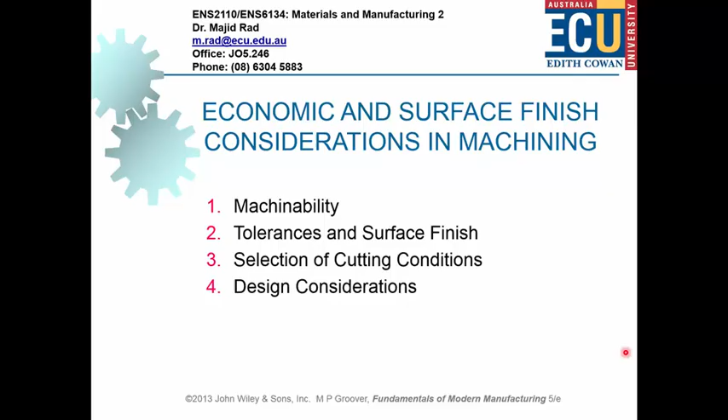What is the definition for machinability? Machinability is defined as the relative ease with which a material can be machined, when we are making use of appropriate machining process or machine tool, cutting conditions, as well as cutting tools, because all of this plays a role in the success of a machining process.

The mechanical and physical properties of the material will play a role in the success of a machining process, and this will affect machinability. For many engineering applications we are interested in high strength and hardness of the material, and for doing this we often add alloying elements to improve its mechanical and physical properties, which may enhance the strength of the material.

However, we should be aware that this will have a negative impact on machinability. As the material becomes stronger and harder, its machinability will be lower. It is harder to machine a stronger material than a softer one, so we may need to compromise between machinability and the strength and hardness of the material.

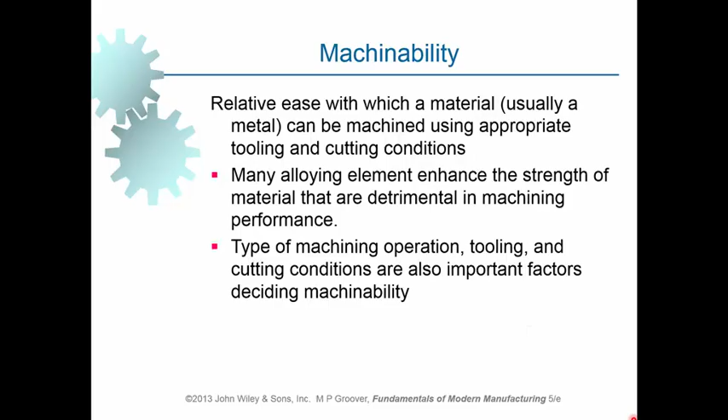When we are dealing with a machinable material or process, the resulting forces and power will be less. The reason is there is a need for less machining forces and power requirements to cut the material because of the lower strength of the material.

Also, when dealing with a machinable material, it's easier to achieve a better surface finish. When machinability is low, the resultant surface finish will not be so good, and we may require additional operations to improve it, increasing the cost of production. However, in machinable materials, by making use of the same process and same cutting conditions, we may achieve a better surface finish, eliminating the need for an additional machining process.

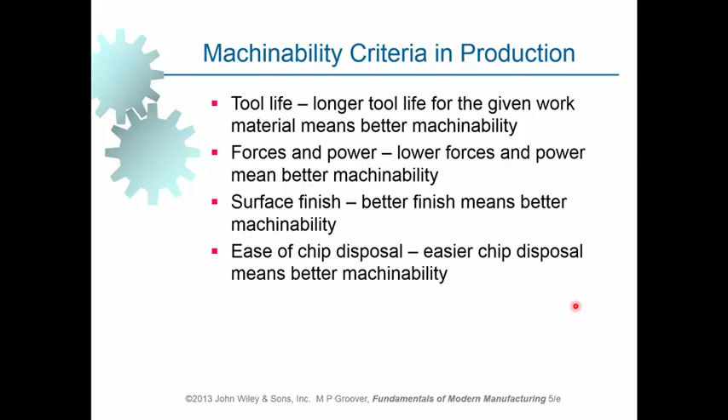Also, the ease of chip disposal is important. Sometimes chip disposal becomes a barrier against productivity. For a material with high machinability, it is easy to dispose of the chip and remove the material from the machine and the work environment.

When we talk about machinability, what we are doing is comparing the ease of machining of one material with other ones, and in order to do that, a number of tests can be performed to rank the materials according to their machinability.

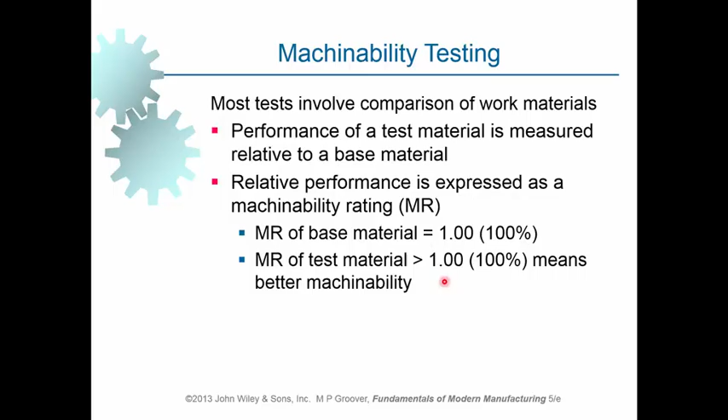The relative performance is expressed in terms of machinability rating, or MR. Often when comparing the machinability of different materials, a material is chosen as the base material and its machinability is rated as 1 or 100%. All other materials are rated in comparison with the base material. If the MR of a test material is greater than 1, it has better machinability than the base material; if its MR is less than 1, its machinability is lower.

Well, now let's take a look at this example problem to see how we can rate different types of materials on the basis of their machinability.

We are familiar with Taylor's tool life equation from the previous lecture. In Taylor's equation, V represents cutting speed, T is the tool life. This exponent, referred to as Taylor's tool life exponent, depends on the quality of the cutting tool material, and it is represented by lowercase n.

For this given example, it is 0.28, and this is equal to a constant value for a given material and operation, that is C. For this base material, the values of N and C are given. We are subjecting the same operation to a different material, the test material, and for this second material the values of N and C are different. N is very close to what we had before, and C is different.

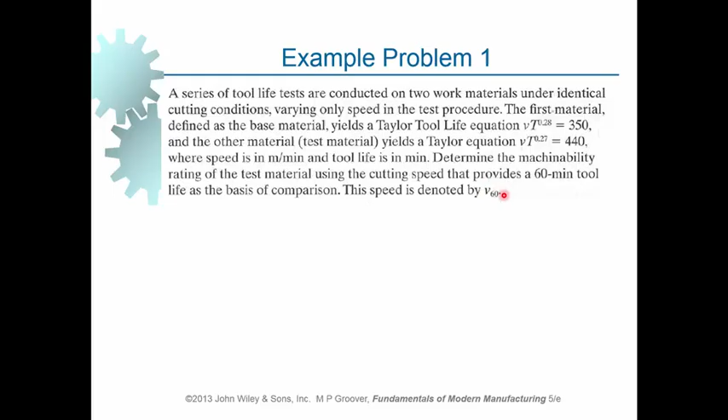In order to do this problem, we've got to make use of the Taylor's tool life equation given here, and we can solve the equation for V, which results in this. Then what is given for the base material in the statement of the problem is to be substituted into this equation.

So the values of C and N are given, and we know that we are going to compute a cutting speed giving us a tool life of 60 minutes. So 60 sits in the place of T. For the base material, a cutting speed giving us a tool life of 60 minutes is computed now, and that is equal to 111 meters per minute.

We can do the same for the second material, or the test material, by substituting the values of C and also N in this equation. Then we can compute the cutting speed giving us a tool life of 60 minutes for the test material, and this comes to 146 meters per minute.

Now, when we want to rate the machinability of this test material with respect to the base material, all we need to do is divide this value, the cutting speed of the test material for a tool life of 60 minutes, by the cutting speed of the base material for a tool life of 60 minutes. This gives us a machinability rating for the test material equal to 1.31, or 131%.

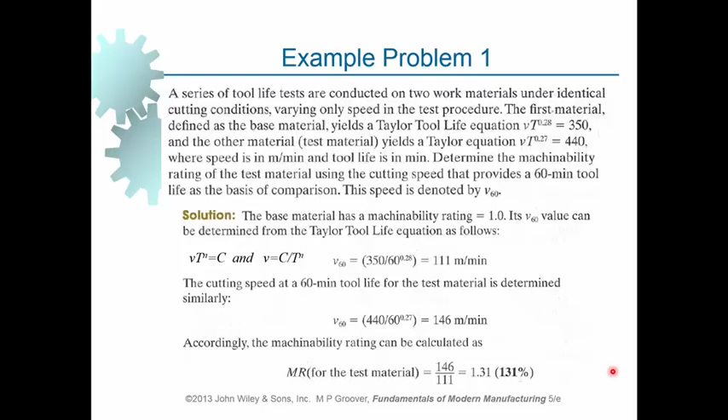What this means is that the machinability of the test material is greater than the base material. So in order to rate the machinability of the test material in this given example, what we took into consideration was the tool life criterion, and this is the most common criterion taken into consideration in assessing the machinability of different types of materials.

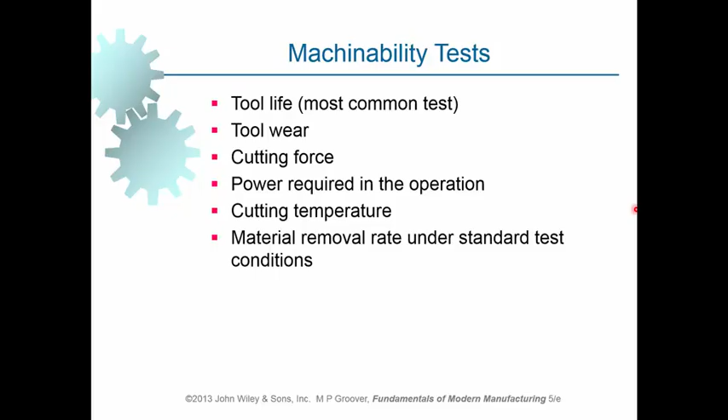Each one of these could be taken into consideration in the determination of machinability of different materials. However, as we can see, tool life is the most common test used to rate the machinability of different materials, and that was the case in the example we considered in the previous slide.

Well, now let's talk about mechanical properties of materials when deciding machinability.

Mechanical properties of materials include hardness. When hardness is high, abrasive wear increases, resulting in shorter tool life and increasing the cost of tooling. As we improve hardness and strength of the material, we decrease machinability, increasing the cost of manufacturing accordingly.

When we talk about hardness of steels, as carbon content increases, the strength and hardness of the material increase, and this reduces machining performance. So selection of a really hard material is no good when it comes to machining.

And strength: high strength means higher cutting forces, and that means specific energy and cutting temperature will be higher.

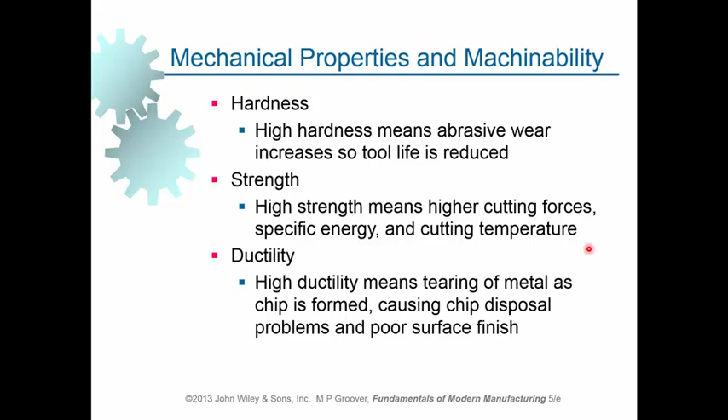Some other alloying elements including lead, sulfur, and phosphorus will reduce the coefficient of friction between the tool and the chip, reducing forces and temperature and also the possibility of creation of built-up edge, resulting in better tool life and better surface finish. So these are some considerations which ought to be taken into account when choosing the material.

Let's take a look at this slide here. In this slide we see a table rating different types of materials on the left against hardness of the material given in BHN, Brinell hardness number, and also machinability rating. In this table, the base material chosen is steel B1112. Its hardness value is given and its rating is 1.

The machinability of all the other materials in this table are rated on the basis of the machinability of the base metal. So B1112 steel is often used as the base metal, having a machinability rating of 1. Taking a look at this table, we can see there are different types of steels and alloy steels, stainless steels, tool steels, cast irons, medium hardness steels, as well as super alloys, titanium alloys, aluminum alloys, and some other types of alloys including copper, brass, and bronze.

Of all these, there are just a few materials with a higher machinability rating, including steel B1113 with a machinability rating of 1.35, free machining steels with a machinability rating of 1.5, as well as alloys of aluminium. Look at this one: the machinability rating of this type of aluminium is 5, which is a highly machinable material.

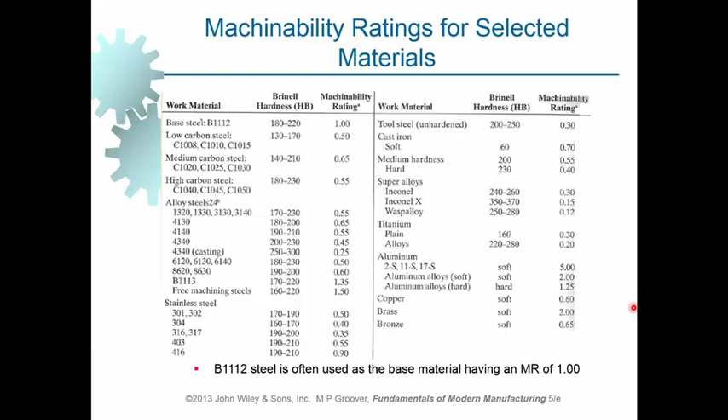This table will give us a rough idea on the machinability of different types of materials when it comes to selection of the material. Of course, it will be less costly and less troublesome when we choose a machinable material for the task of production. Of course, we've got to take into consideration so many other parameters, and only one of them could be machinability.

In this slide we can see a number of considerations for tolerances as well as surface roughness when machining a material. What are the range of tolerances that can be achieved in a typical machining process? And what surface roughnesses can be achieved in a typical machining process?

Indeed, we know that we need to define and utilize tolerances when machining a part, because no machining process is perfect and it is not possible to achieve a precise dimension for a product. There is always a range defined as tolerance, and the part is acceptable as long as it is made to a size within the tolerance limits.

When assigning tolerances, we should take into consideration that closer tolerances usually mean higher costs. So we should not assign a tolerance that is too close and tighter than what is really needed. It should be tight enough to perform its function. As we tighten the tolerance, we increase the cost of machining. I will give you an example in the next slide about this.

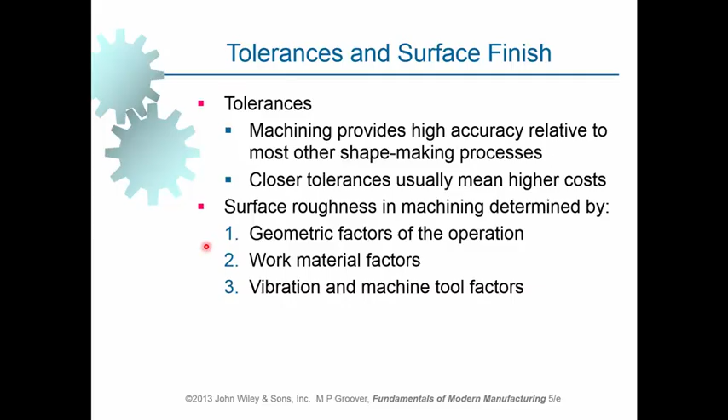When we talk about surface roughness in machining, we should know there are some parameters affecting the resultant surface finish in a typical machining operation. Those include geometric factors, work material factors, as well as vibration and rigidity of the machine tool itself.

Let's take a look at this slide, which provides typical tolerances and surface finish or surface roughness values that can be achieved in traditional machining processes. We can see different types of machining operations in the left column. In the middle column we have typical tolerances that can be achieved from these operations, and in the right column we have the surface roughness achievable with the given machining operation.

For example, when we make use of a lathe for a turning operation, we can achieve a surface roughness of 0.8 micrometer. The resultant tolerance, or tightness of tolerance, that can be achieved depending on the dimensions of the cutting workpiece is presented here.

When the diameter of the workpiece is less than 25, we can achieve a tight tolerance of plus and minus 0.025 millimeter for the given dimension. As the diameter of the workpiece increases, the width of the tolerance region also increases, so we end up with a wider tolerance band for the acceptable parts.

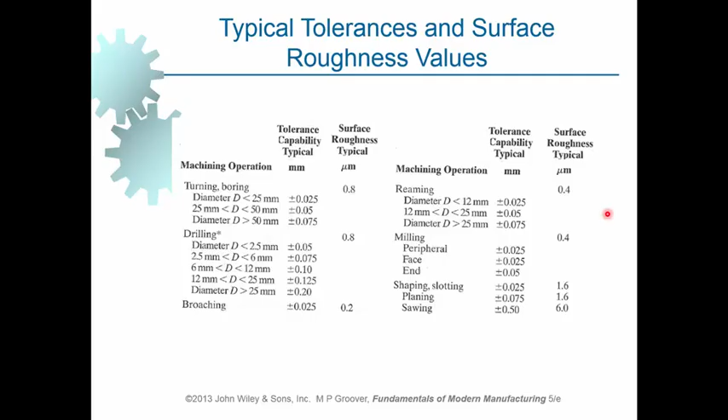Surface finish and surface roughness are both used when it comes to surface quality. However, surface roughness means how rough the surface is, while surface finish means how smooth the surface is. So both terms are used in industry, and often surface finish is used rather than surface roughness. However, the instrument used to measure the quality of the surface is the surface roughness instrument, because it measures the roughness of the surface, which is opposite to what is meant by surface finish.

Let's move on. If we take a look at a machined surface with the unaided eye, what we see is a smooth surface. If it is a flat surface, then we see a straight surface. If it is a round surface, then we see it as a round surface.

However, if we take a close look at it by making use of a microscope, we will see something representing a really rough surface. It's anything other than smooth, as we can see here. Those layers on top of the surface are actually elongated. Those grains are elongated as a result of applying machining forces in the machining process.

In many cases we are interested in achieving a better surface finish. Reasons are actually aesthetic, or sometimes surface finish may increase or improve safety. It may lower friction and also wear depending on surface characteristics. If we are talking about mechanical and physical properties, a high surface finish will actually improve the quality, mechanical properties, and physical properties of the material.

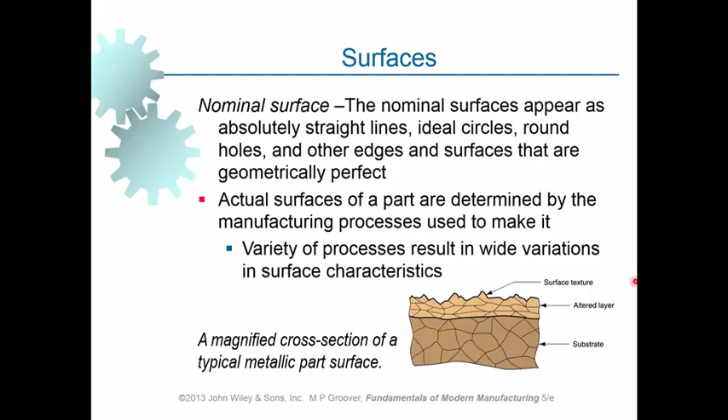How can we do this? We've got to utilize the proper machining parameters, including feed, in order to improve the surface finish as much as possible. And if we still aren't achieving the required surface, we may need to introduce additional machining operations, including grinding, lapping, and some other operations used to improve the surface finish after the machining operation.

Let's talk about this slide. What we see here is the representation of the surface texture. Generally, when we talk about the texture of a surface, meaning the topography and geometric features present on a surface, we are dealing with four elements that represent the texture of the surface, shown here in this figure.

Let's begin with roughness. This is what we measure in the lab of this unit when we do the machining task. Indeed, in the lab we produce a surface on the machine, and then we measure the surface roughness of it. And this is exactly what we are doing.

As you can see, when the cutting tool is taking the cut, the surface of the workpiece is cut by the tip of the cutting tool, and then some feed marks are left on the surface of the workpiece. If we take a close look at it, a rough surface is produced, and by making use of the surface roughness measurement instrument, we are measuring how rough the produced surface is.

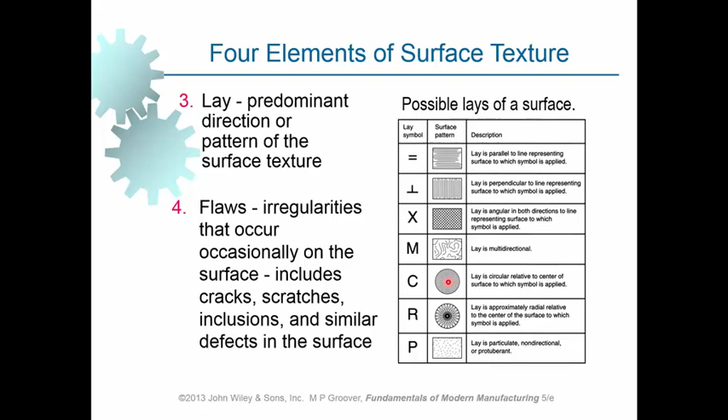In the next slide, I have different types of patterns that can be seen on machine surfaces, which represent the motion of the cutting tool used to make it. For example, here the motion of the cutting tool has been along this direction, or in this one, as you can see, the cutting tool has moved from the outside diameter going inside, which is used when we are doing the facing operation on a turning machine.

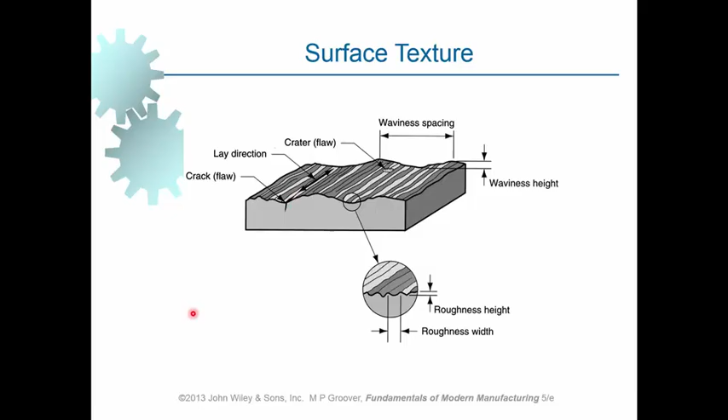Okay, that was a brief description of the texture of the surface. Now let's take a look at this slide here, which is showing a surface that has been machined. If we take a close look at it, we will see some depressions as well as protrusions present in a machined surface.

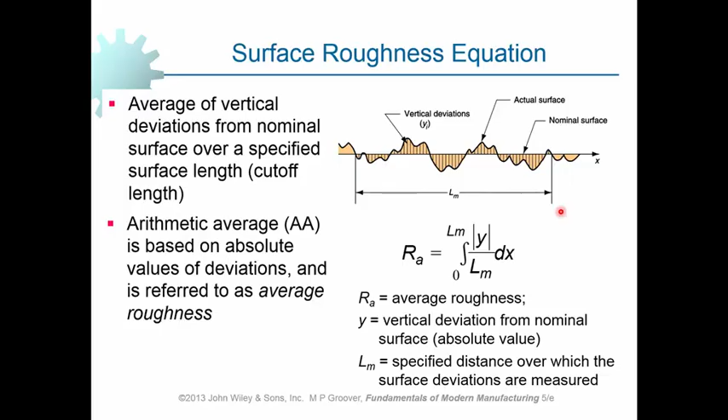The arithmetic average surface roughness can be represented by this equation, taking into consideration the height of the protrusions or the depths of depressions, as absolute values, within a predetermined length referred to as cutoff length. These cutoff lengths should be determined in a way that does not take the waviness of the surface into consideration. So this equation is used in order to measure average surface roughness.

Well, let's talk about geometric factors that affect a machining process.

Indeed, the machining parameters that determine surface geometry are listed here, and those include the type of machining operation. What type of machining operation is used in order to produce the part? Milling, turning, shaping, drilling, or any other type of process will have a different effect on what is produced. The geometry of the cutting tool, its size and shape, will also play a role in the resultant surface, as well as the feed, which will have a great impact on the resultant surface finish.

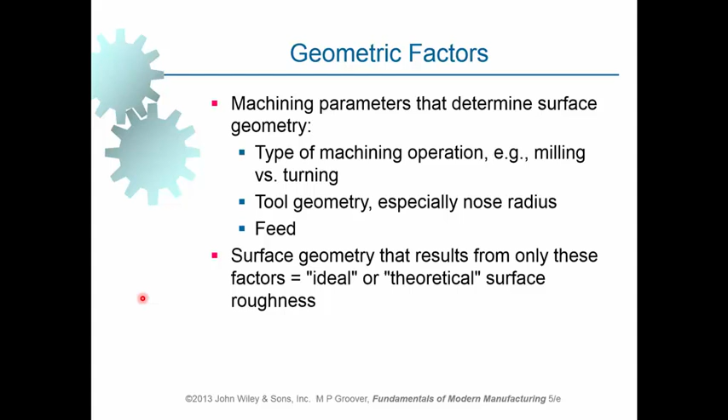And the surface geometry or surface finish can be measured in terms of ideal or theoretical surface finish, which could be different from the actual surface finish. Let's explain this in the next slide here.

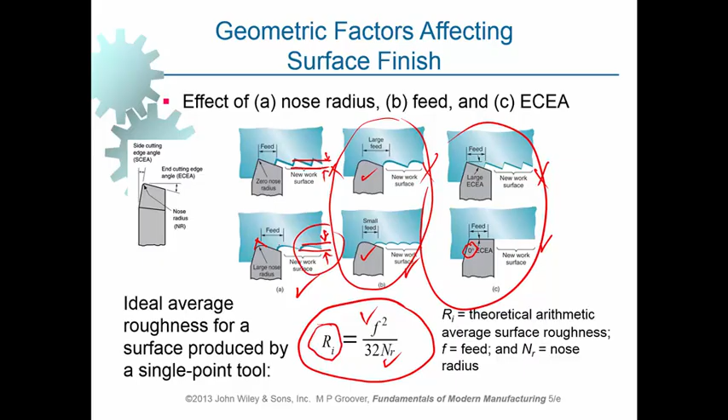Okay, let's move on to this one.

As I mentioned in the previous slide, the actual value of surface roughness, RA, could be worse than the ideal value of surface roughness because of parameters such as vibration of the machine tool and so many other parameters, including the properties of the workpiece material itself, that are not taken into consideration in the equation of the previous slide.

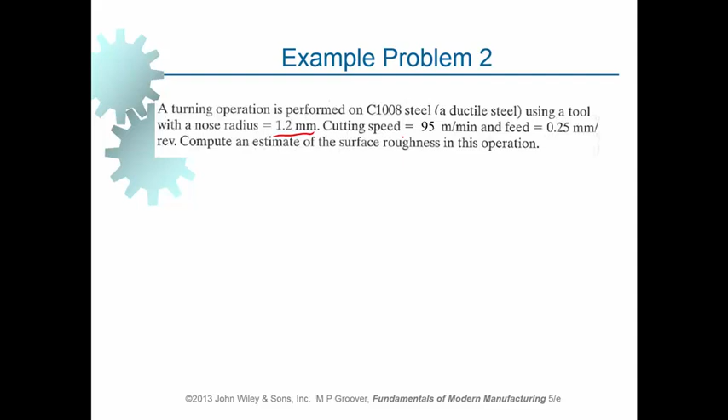In this example problem, there is a turning operation performed on C1008 steel, which is considered a ductile steel. The cutting tool has a nose radius of 1.2 millimeters. Cutting speed, or V, is given equal to 95 meters per minute, and the feed is given as well. So we've got F, we've got V, and we've got NR, all given, and the type of material is also given, that is a ductile steel.

The task is to compute an estimate of the actual surface roughness in this operation, or RA. How do we do this?

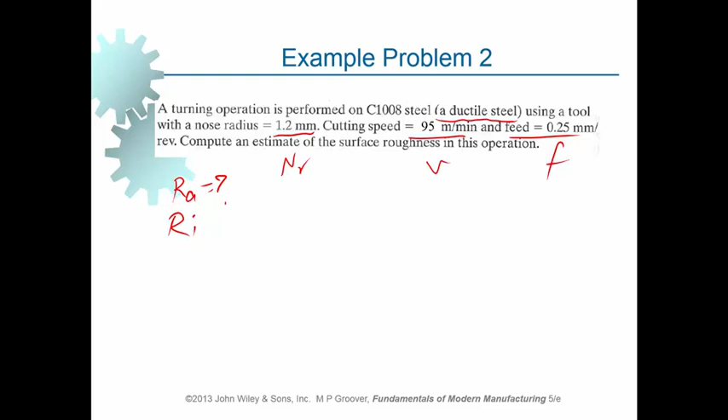In order to do this, we first need to compute the value of theoretical surface roughness, that is Ri, using the equation we have. Then we make use of the chart from the previous figure, take the value of RAI out of it, and multiply Ri by RAI, which will give us an estimate of the actual surface roughness.

The equation for surface roughness, as we had it in the previous slide, is Ri equals feed squared divided by 32 times the nose radius. F is given, and NR is given. By doing this, we can compute the value of theoretical or ideal surface roughness, which equals this much in micrometers. And then we've got to take the value of RAI from the chart.

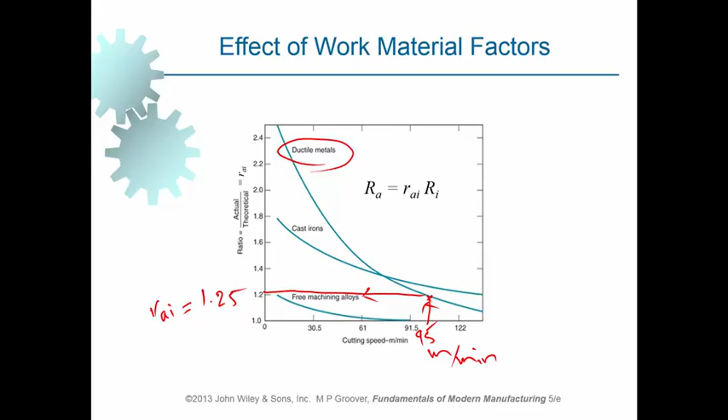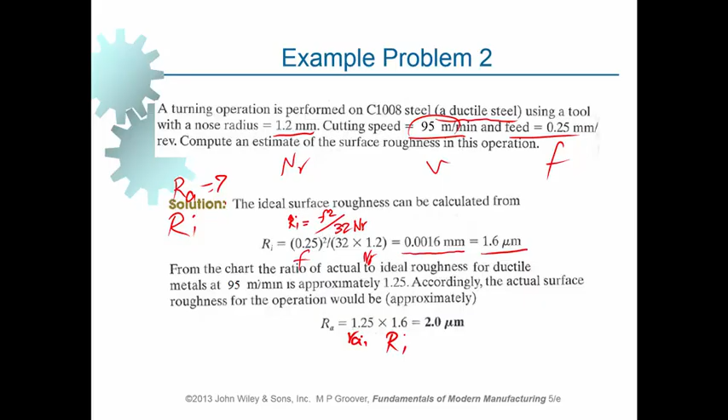So the value of RAI is equal to 1.25 for ductile material at this given cutting speed. We take the value of RAI out of this chart, and then multiply it by the value of Ri we just computed, which will result in a good estimation of the actual value of surface roughness for this given example.

Now let's talk about the selection of cutting conditions. One of the most important tasks in any machining operation is to properly select cutting conditions resulting in maximum profit, which could be achieved through maximum production rate or minimum unit cost criteria.

In order to do that, there are four parameters that are more important than others in any machining operation: depth of cut, feed, cutting speed, and the utilization of cutting fluid. Depth of cut is decided by the geometry of the workpiece and machining operation, so we are not going to talk about it right now. And the selection of the cutting fluid depends on the quality of the material and also the cutting tool.

Let's talk about the selection of feed. We just discussed how to compute the value of feed in the finishing operation. In the roughing operation, it is not really important, so we've got to decide it on the basis of the rigidity of the machine tool, the power requirement, and the rigidity of the cutting tool itself. Only for the very last cut will we compute the value of feed as discussed in the previous example.

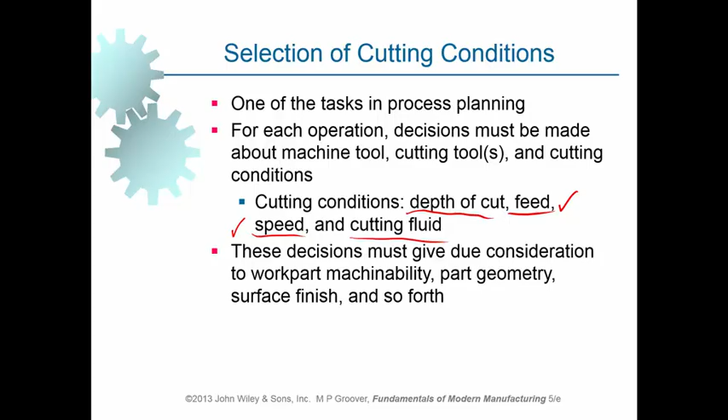And how do we choose the cutting speed? Let's talk about cutting speed a little bit more in detail, which is a very important parameter in deciding the success of the machining process.

What I have highlighted up here is when we are going to decide about feed and cutting speed: always feed first, speed second. How do we decide feed?

Well, it's been briefly discussed in this slide here. To determine feed, we've got to take into consideration the type of tooling and the quality of the cutting tool that is used. For high speed steels, we will have different values of feed compared to carbide tools, ceramics and so on, and of course it depends whether we are doing a roughing operation or finishing.

For finishing operation, there is a limit that must not be exceeded, as feed is the parameter that will significantly affect the quality of the surface finish. In the very last step, the finishing operation, we've got to actually compute the value of feed, and it should not exceed the computed value if we are to achieve the desired surface finish. So this is briefly discussed.

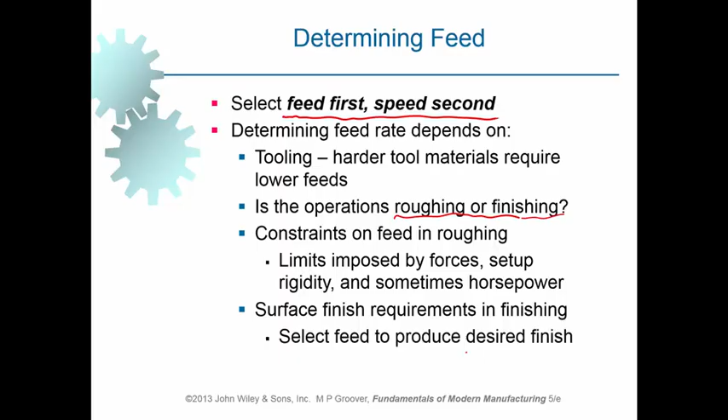Let's move on to the next slide and talk further about selection of cutting speed. As I said, when we are going to choose cutting speeds, generally we've got to consider one of two criteria listed here: maximum production rate or minimum unit cost. Maximum production rate criteria should be selected when demand for the product is high, so we can make more profit out of selling more products.

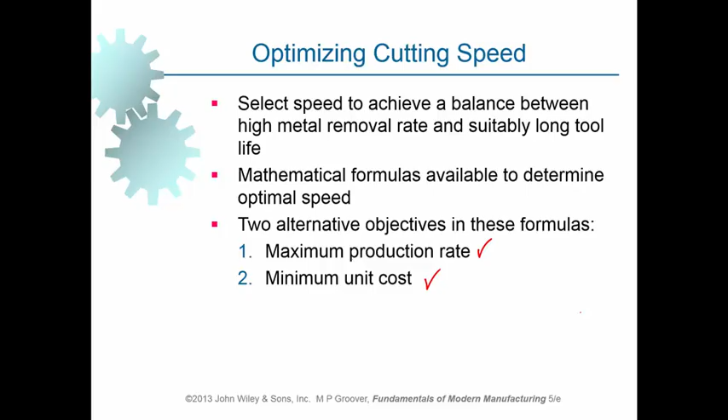If this is the case, we are interested in maximum production rate. If this is not the case, the demand for the product is low, so we've got to make profit by lowering the cost of production and tooling. Then we go for the next criteria, that is minimum unit cost.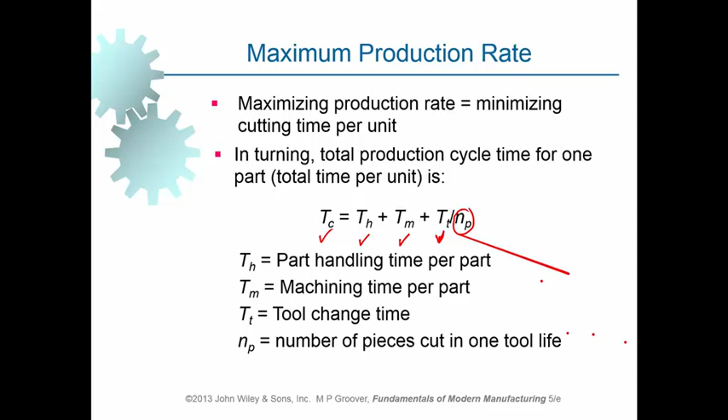Of course, we don't make use of a single tool in order to produce, and we don't change the tool for every production. Once a tool is changed, we can make use of the same cutting tool to produce a number of parts, and the number of parts that can be produced after a tool change is defined by NP.

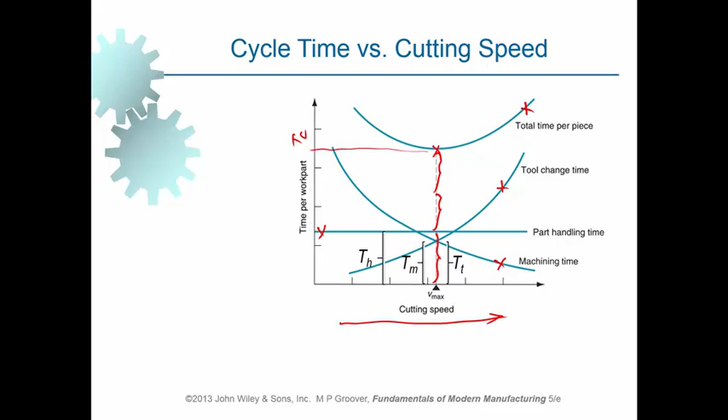How do we compute this value? Credit goes to Gilbert, who has defined this model for computation of a cutting speed giving us maximum production rate. On the basis of what we discussed in the previous slide, we have this equation for computation of TC, or cycle time for production of one piece of product. If we compute the value of NP and Tm and substitute these values into this equation, then we end up in this equation down here.

How do we do this? NP, that is the number of parts to be produced by one cutting tool, how do we compute it? T represents tool life and Tm represents machining time in a turning operation. Equation for tool life can be computed from Taylor's tool life equation that we discussed in the previous lecture, and the equation for Tm, machining time in turning, is something that we discussed in lecture 5.

By substituting the values of T computed from this equation and Tm from here into the equation of TC, then we end up in this equation down here. And we know that from the math units we have done before, for computation of local maxima and minima, what we need to do is take the first derivative of the equation and equate it to 0. So we take the first derivative of this equation with respect to cutting speed and equate it to 0, which leads to computation of this equation.

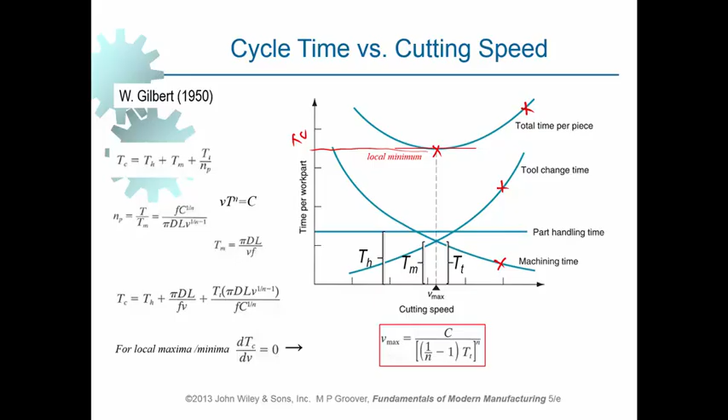And this is what Gilbert has done in 1950. You don't need to worry about all this computation. What we need to worry about is how to use this equation which is in the frame, in order to compute the cutting speed giving us maximum production rate.

And then if we want to compute the value of cutting speed giving us minimum production cost, we've got first to consider the equation giving us the unit cost as presented here. This equation here is telling us how we can compute the value of CC, that is the cost of production of one unit of the product. It has got a number of components.

In this equation, CO represents the operator cost rate, TH, TM, and TT mean as we just described in the previous equation. CT is the cost of tooling, and everything else is already previously discussed.

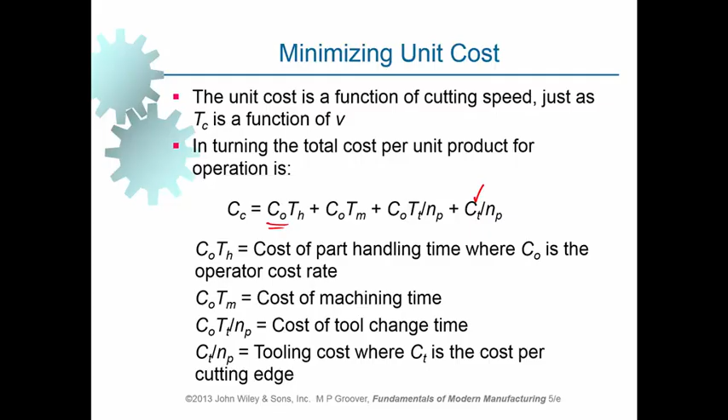Now Gilbert has also done the same task for deriving the equation for cutting speed giving us minimum production cost, and it's just shown here in the frame. Again, how it is derived is explained here. You don't need to worry about what I have explained here. This is just for your information.

However, the basic equation for computation of the unit cost is given. Then when we substitute the values of TM, and also CT in the equation, it results in this equation. By taking the first derivative of this equation with respect to cutting speed, or V, and equating it to 0, this equation is concluded.

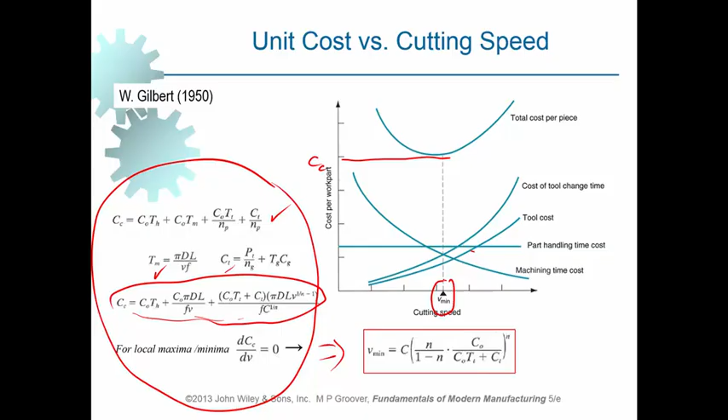What we need to worry about is how to utilize the equation in the frame in order to do the computations, and this will result in the lowest value of unit cost. So with this equation we can compute the cutting speed giving us minimum unit cost, which is derived in this equation.

Okay, now let's do a couple of examples in order to see how we can utilize these equations to compute the values of cutting speed for the given problems.

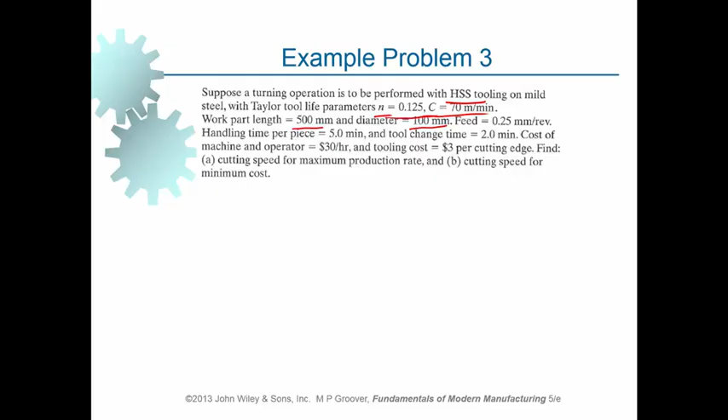In this problem what we have is a turning operation. In the turning operation we are making use of a high-speed steel cutting tool, and Taylor's tool life equation values of N and C are given, as we can see here. The workpiece has got a certain diameter and length, given here. This is the length, and 100 millimeter is the diameter of the workpiece to be cut. Feed, or F, is given, so we have got the value of L, we have got the value of D, we have got the value of F.

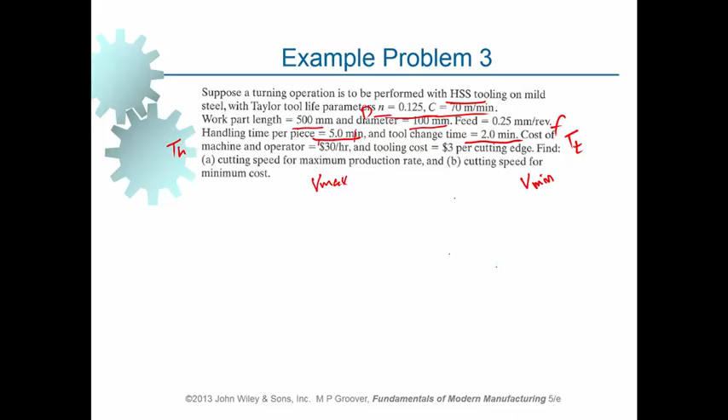Handling time, or time for loading and unloading, is also given, that is TH. And then tool changing time is given equal to 2 minutes, that is TT. The task for us is to compute a cutting speed for maximum production rate, that is maximum V, and also the cutting speed for minimum cost, that is V for minimum cost. How do we do this? We've got to make use of the equations that were introduced in the previous slides.

This is the equation for maximum production rate of V. C is given, N is given, T is given, and changing time. If we substitute those values into this equation, we can easily compute the value of V for maximum production rate.

Now by making use of the equation for cutting speed for minimum cost, let's see if everything is given. C and N are given, of course. CO, which is the operator cost for machining, let me see if this is given. Yep, it's given up here, $30 per hour.

We've got to convert it into dollars per minute before it is used in this equation. CT is also given down here, it's $3 per cutting edge. If we substitute all these values into the equation, we can compute the cutting speed for minimum cost.

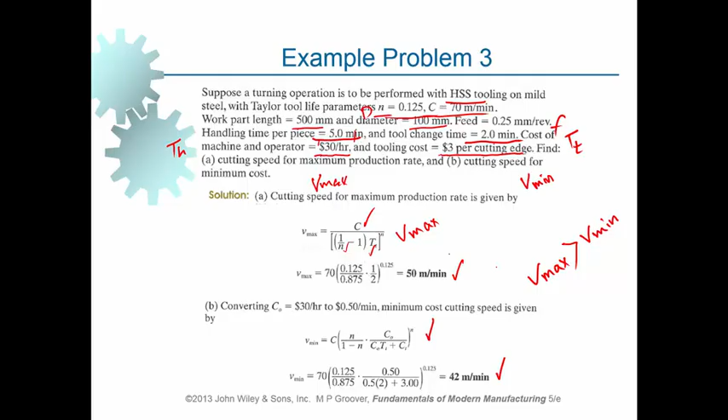As you can see, the cutting speed giving us maximum production rate is greater than the cutting speed giving us minimum production cost. That's very obvious. When we make use of maximum V, tool life will be less, and this will increase the cost of tooling. However, we make profit out of making more parts. When V is less, tool life will be greater, so tooling cost will be less, and we save the cost of tooling, which results in lowering the cost of production.

In problem 4, it's asking us to determine the hourly production rate and also cost per piece for the two cutting speeds computed in the previous example.

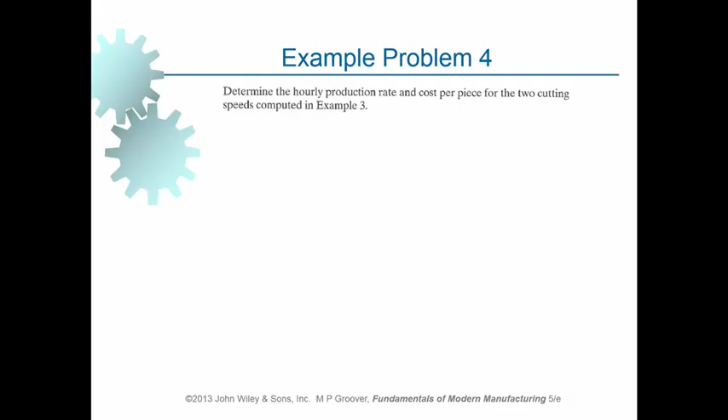In order to do this problem, what we need to do is make use of the equations for cycle time that we just introduced, as well as the equation for unit cost. So we've got this equation for cycle time and the bottom equation for unit cost.

To do the problem, first we need to compute the value of machining time here by making use of the equation that we had in one of the previous lectures. Let me see what equation number it is. That is equation number 21.5, this one we had in lecture 5.

And this is equation 22.1, we had it in lecture 7. So we make use of the equation of TM, machining time for turning, taken from lecture 5. We do the computation of TM, then we do the computation of tool life from this equation. Then we substitute the values into the equation for TC and CT and do the computation of cycle time, the time that is needed to produce one part.

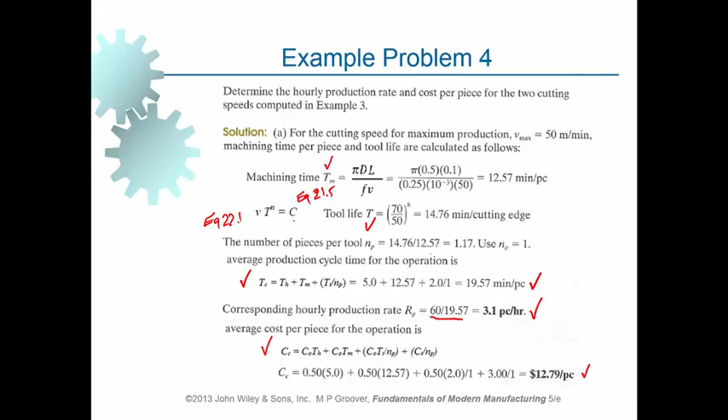Now we repeat this for the minimum cost criteria, which is down here, and again compute the production rate for minimum cost criteria as well as unit cost for minimum cost criteria. As you can see, these are both less than what we had for the previous case, because now we are not targeting maximum production rate, rather we are targeting lower cost of production.

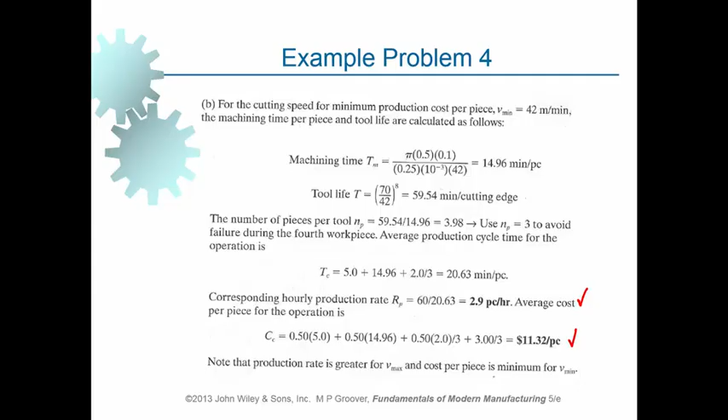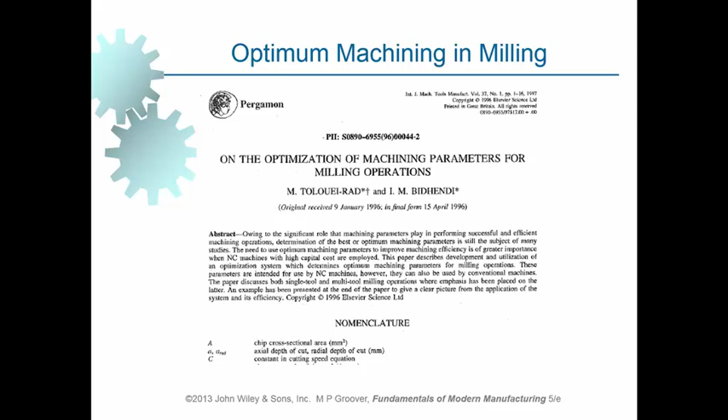This is not for this unit, this will not be included in the final exam, just for your information. In case you need to do the computation of the machining parameters, optimum machining parameters for milling in the future, you can refer to this paper, and all the models can be found in this paper which I have just introduced.

I am leaving to you the rest of the lecture, which is a review of design considerations in order to lower the cost of machining in traditional machining operations. And that's all for today.